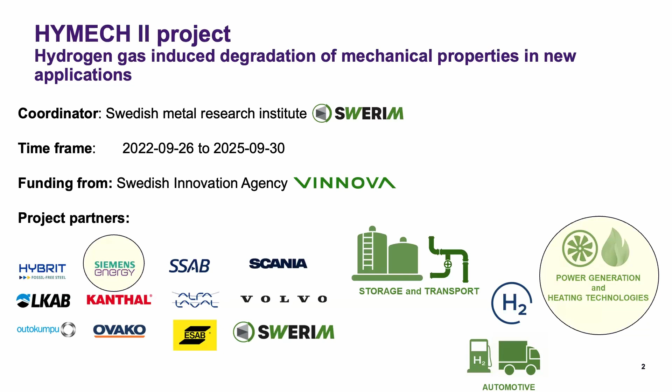So if we start with the application, at Siemens Energy we have different products, but one of them is the gas turbines. What we use this for is basically electricity production. So we connect the generator to this shaft. And how do we make it spin?

We can go through the operating principle very quickly: the air goes in through the inlet and is compressed in a compressor. Then the fuel comes in and is mixed with the air and combusted to produce a hot stream of gas that drives the turbine, which creates the work both to drive the compressor, and then we get the remaining work that can be used for electricity production.

And today, traditionally the fuel has been natural gas, but as you may suspect, there's a drive to replace the natural gas with hydrogen for decarbonization. I will focus now on the burners of the gas turbine, where the fuel and air is mixed and combusted.

And the loading of these components is rather complex. What is limiting the life, first of all, can be oxidation - that they simply oxidize, and that is limiting the life. But if we're talking about the mechanical loading, it's coming from the thermal strains when we start and stop the turbine. So basically a form of low cycle fatigue, but thermomechanical fatigue then, because the temperature and the mechanical loading has a cyclic variation.

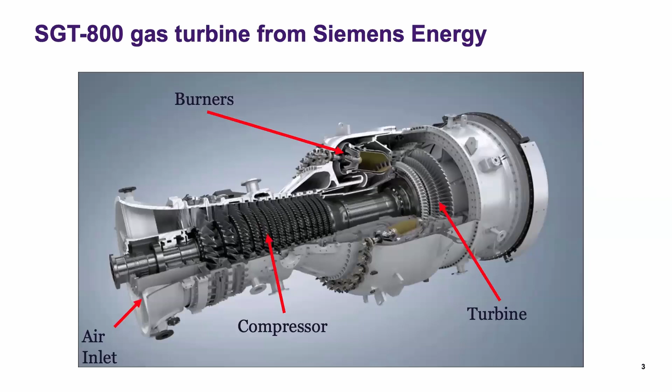I liked what Chris said earlier today about if you want to do lifing for hydrogen, you should use materials data generated in hydrogen. So I agree with that, but at the same time, we know that we need thermomechanical fatigue data to do the lifing. And generating thermomechanical fatigue data in hydrogen is very difficult, and or not possible at the moment, at least not with any standardized testing method. So we can get back to that a little bit later regarding the testing methodology.

But now I want to give you some background regarding the material of the burners. For hydrogen operation, we need to use additively manufactured materials. I will not go into any details about the combustion technology, but we need to be able to have this design freedom, complex geometries. So in this case, we can produce the whole burner as one monolithic part.

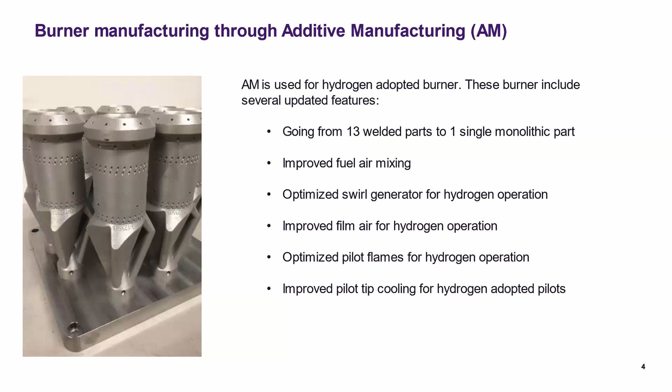The material then, now this is not additively manufactured - this is conventionally manufactured Hastelloy X material, which is the solid solution strengthened nickel-based alloy I will be focusing on. It has an equiaxed grain structure, no large anisotropy, and there are some carbides, but they don't provide much strength. It's not precipitation strengthened in the material.

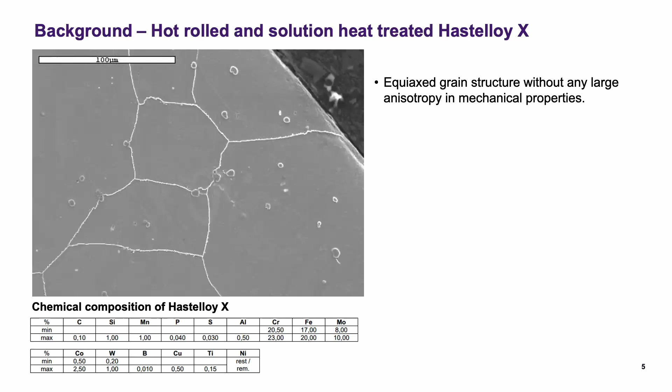And if we go to the LPBF printed, because that is the additive manufacturing method we use, laser powder bed fusion, we can see, as we've seen also in previous presentations, that we get the columnar grain structure and the highly anisotropic properties.

And the chemical composition is within the specification for conventional Hastelloy X, but one difference is that it typically has a significantly lower carbon content. In the hot rolled Hastelloy X, we only have a maximum limit on the carbon.

Okay, and this is just to show you the loading direction of the specimens that were tested. We had a limited test scope, so we were forced to select one loading direction, and we went for what we thought was most critical, the transverse direction to these columnar grains.

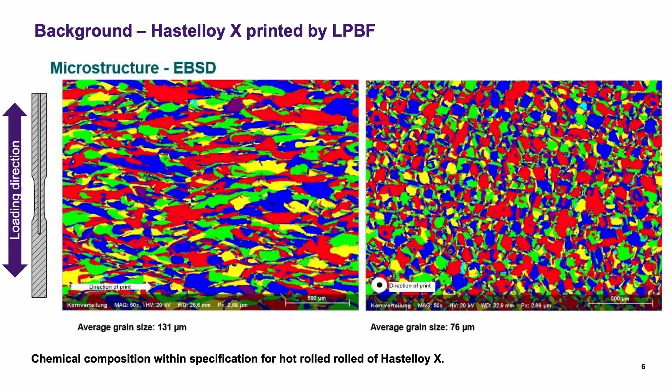The whole specimen testing method has already been introduced several times, I think. And as I mentioned, we are testing two different materials, the hot rolled Hastelloy X, which is also in a solution anneal condition, whereas the additively manufactured material is used in the as printed condition.

So we do slow strain rate tensile testing at the temperature of 20 degrees and 800 degrees. And we have an internal pressure of 200 bars and a strain rate of 10 to the -5.

And we interrupt the test upon leakage, and as soon as it starts to leak, we don't have any hydrogen anymore, which is important to consider for the high temperature testing. We measure the hydrogen content afterwards, but if it spends too much time at high temperature after the leakage, the hydrogen will escape in a rather short time. So what we measure after the test could be underestimating the hydrogen content that we actually had upon leakage.

And I've shown here that also the internal surface roughness is kept within the limits of what is expected to be the limits of this standard that is under development.

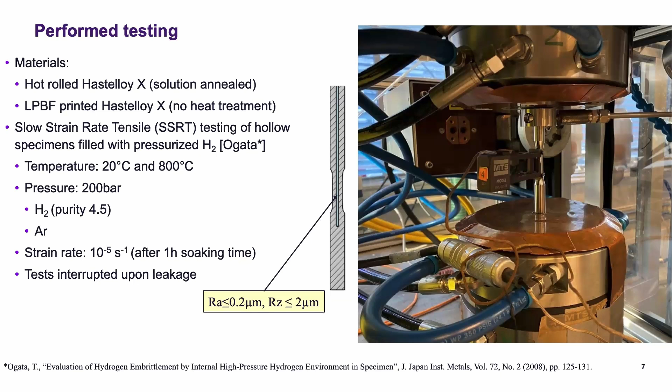So if we look at the results, for many of you in the room, these will probably not be that surprising. For the hot rolled Hastelloy X, there is data in the literature that as long as you don't have huge hydrogen concentrations in the material, it should be rather insensitive to hydrogen embrittlement. Here we see very small difference between the hydrogen and argon tested material, both in strength and ductility.

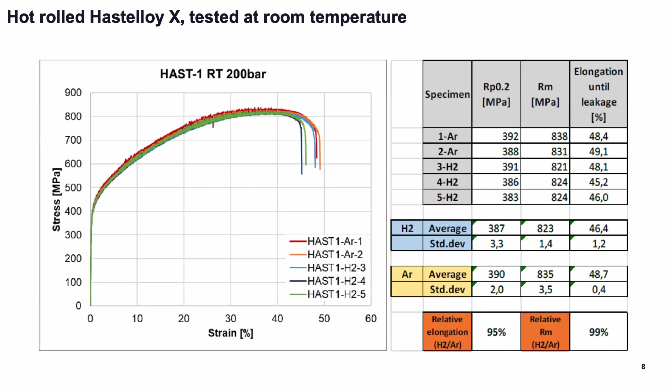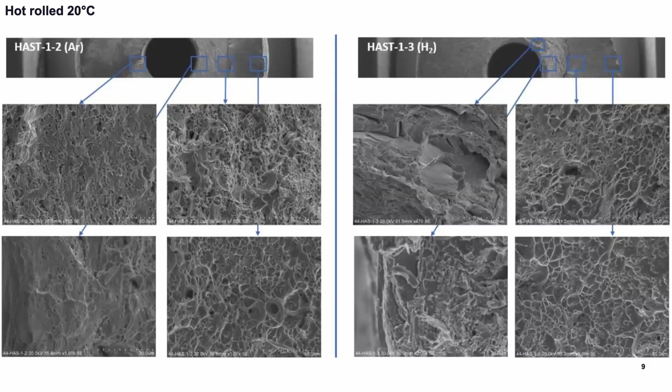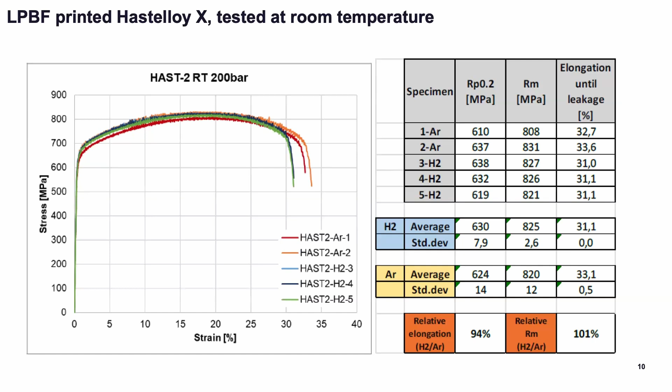For the printed Hastelloy X, we also see very small differences, with relative elongation of 94%. And the fracture surfaces look very similar in hydrogen.

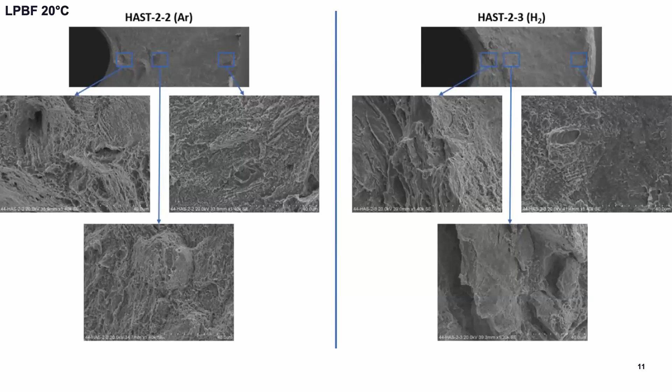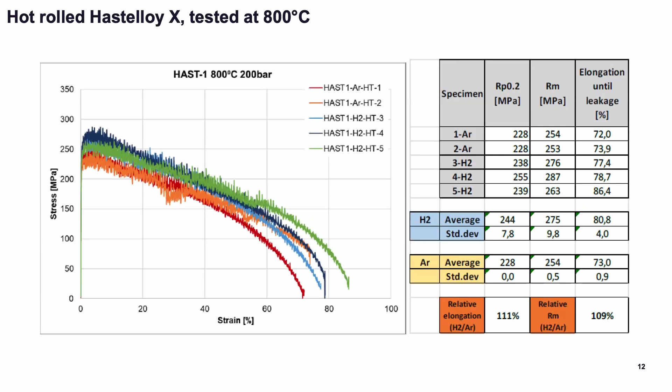If we go to the high temperature testing, for the hot rolled Hastelloy X material at 800 degrees slow strain rate, we obviously have a very large creep influence, so much lower strength, but we do have a very large elongation to fracture. In this case it's actually higher in hydrogen than in argon, but I think that mostly reflects the scatter of the testing than anything else.

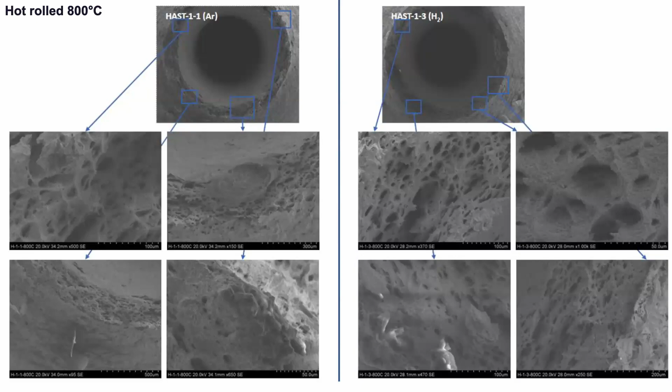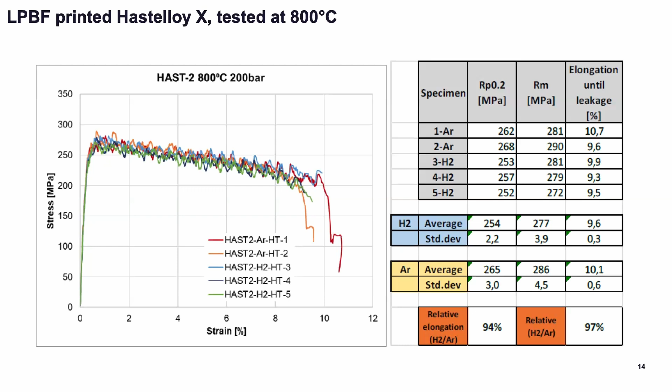The fracture surfaces are typical creep fracture surfaces with creep voids. The printed material tested at 800 degrees has a much lower elongation to fracture compared to the conventionally manufactured material, both in argon and hydrogen, which is expected due to the completely different microstructure with the fine cell structures we have. This is already considered when we design with this material, and the good news is that it doesn't get worse with hydrogen. The fracture surfaces look quite similar in argon.

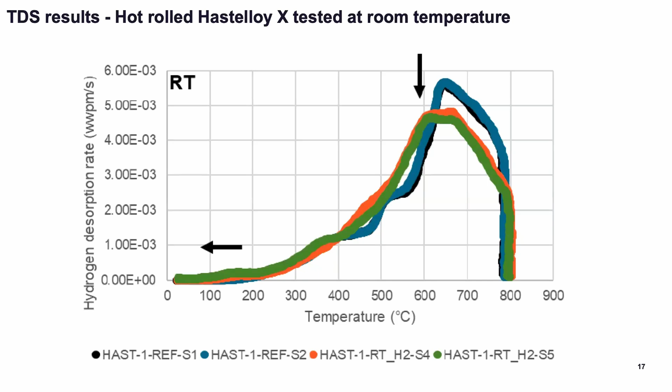I can quickly mention the TDS measurements. We see for the hot rolled Hastelloy X at room temperature, we have more or less no hydrogen uptake measured. We measure the bulk of the whole parallel length, so it's not surprising. But maybe we see some shift to weaker trapping sites.

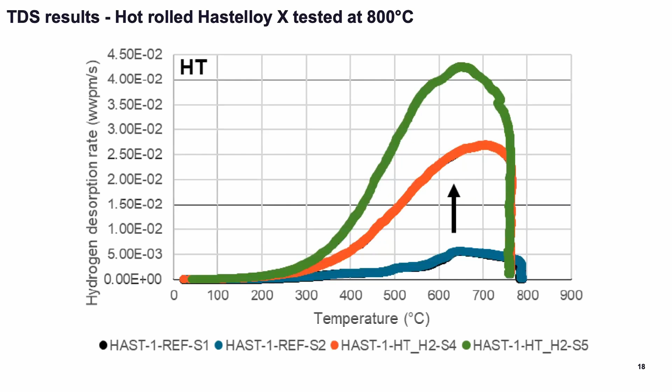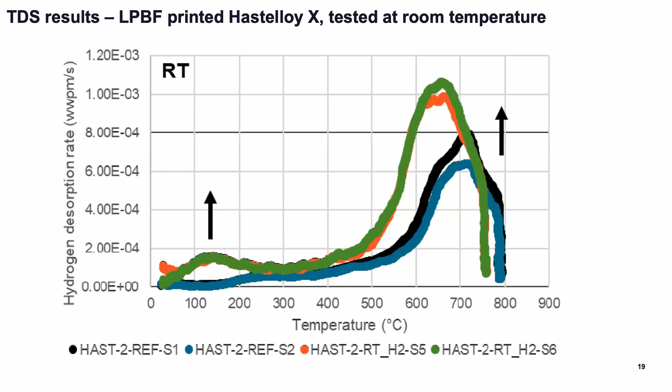The printed Hastelloy X tested at room temperature, we detect some hydrogen uptake. The reference concentration is lower than for the wrought material. And we maybe detect some uptake, and also maybe a shift to weaker trap sites.

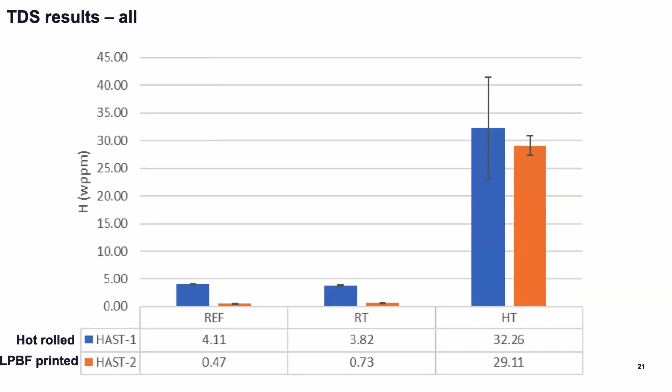And this is the overview. I think it says basically the same that I just said.

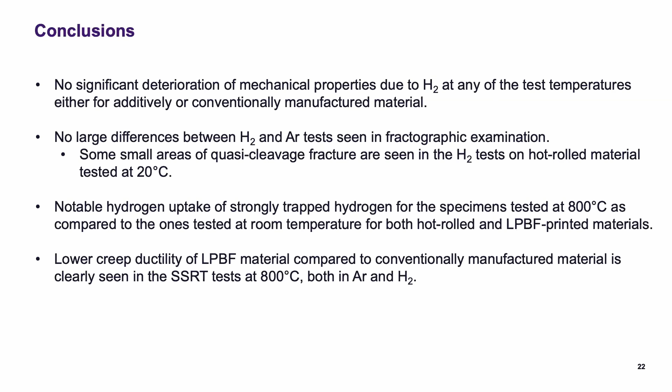The conclusions are that we don't see any significant deterioration of mechanical properties due to hydrogen at any of the test temperatures for any of the materials. We have these small localized areas of quasi-cleavage, but it's not really reflected in the test results. The lower creep ductility has nothing to do with hydrogen, it's expected. And of course, at 800 degrees, we do have hydrogen uptake during the testing.

The outlook here is that we need to develop the testing methods. We want to do fatigue testing of hollow specimens with service-like loading and temperature, so basically thermomechanical fatigue testing.

We also want to study the influence of aging. As I mentioned, we will get precipitation of carbides and other phases during operation, and how will this influence the hydrogen embrittlement?

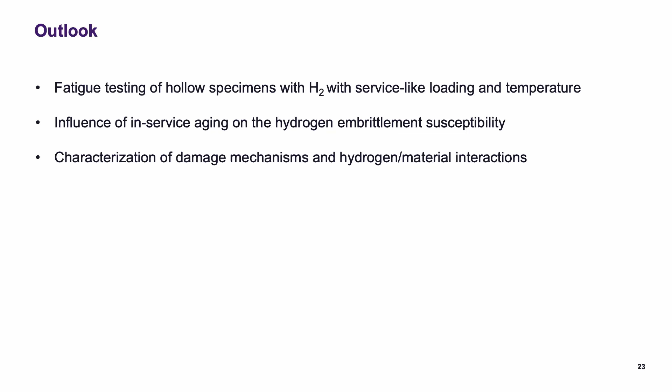Last of all, characterization of the damage mechanisms. We only did basic fractography so far, but until we have a material that has been exposed in a representative way, that's when it gets really interesting to do the characterization work.